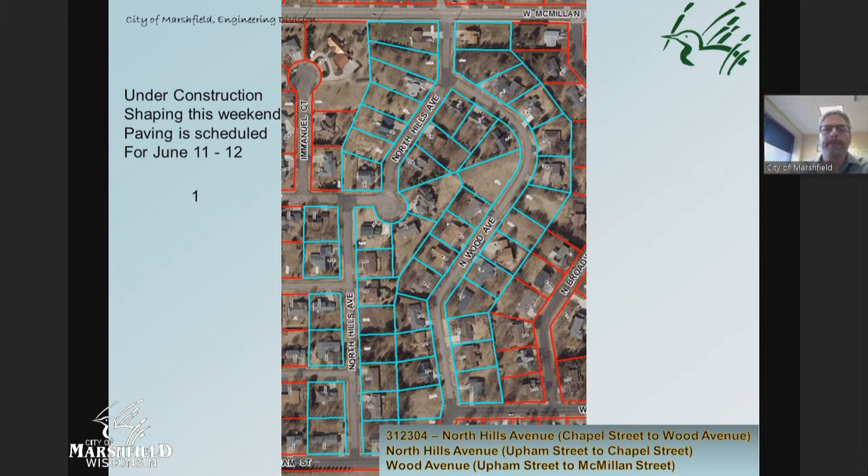With that being done, they're planning to move their crews to Fairview Street and start on Wednesday, June 10th. This is from Schmidt Avenue to the west.

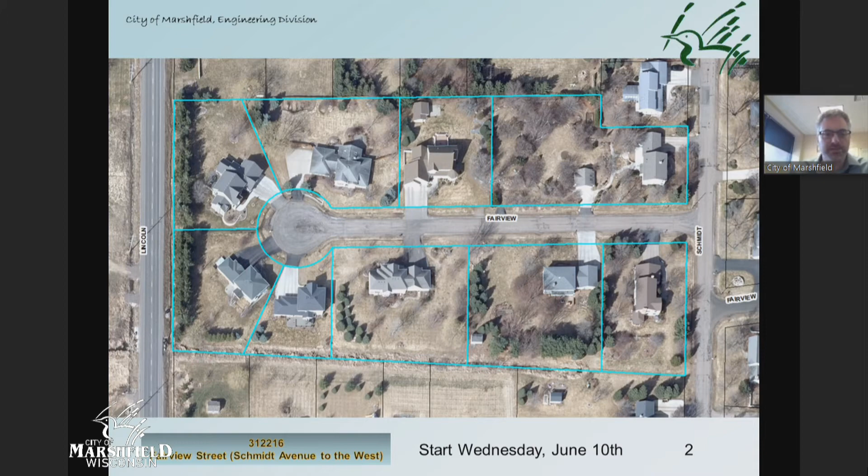Following that project, they will move to 4th Street, Larch to Mulberry Avenue, and then Mulberry Avenue, 4th to the Cul-De-Sac to the north.

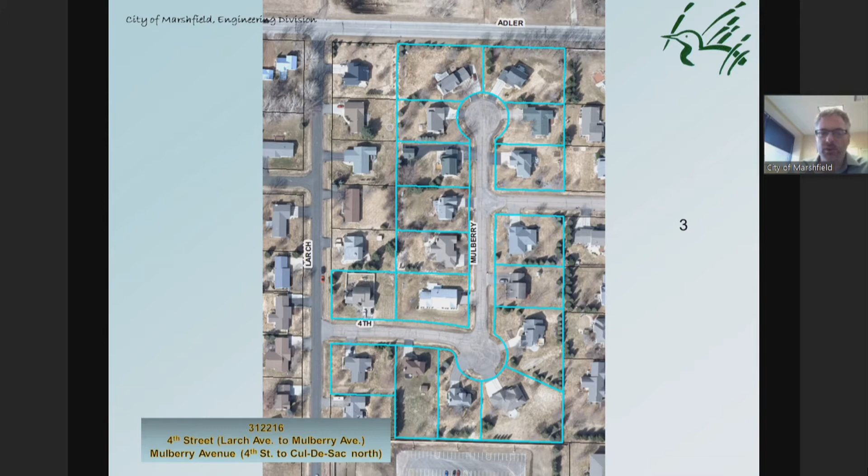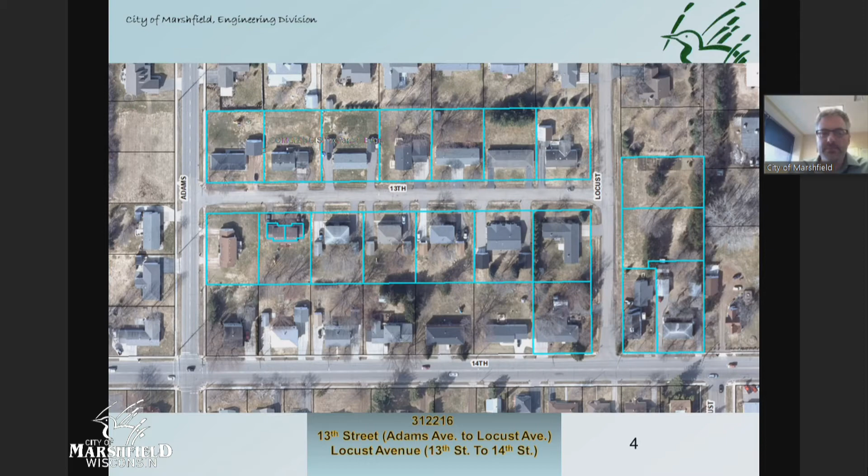And then they will move to 13th Street, Adams to Locust, and Locust Avenue from 13th Street to 14th Street. Then they will work their way down to Schmidt Avenue from 14th Street to 17th Street.

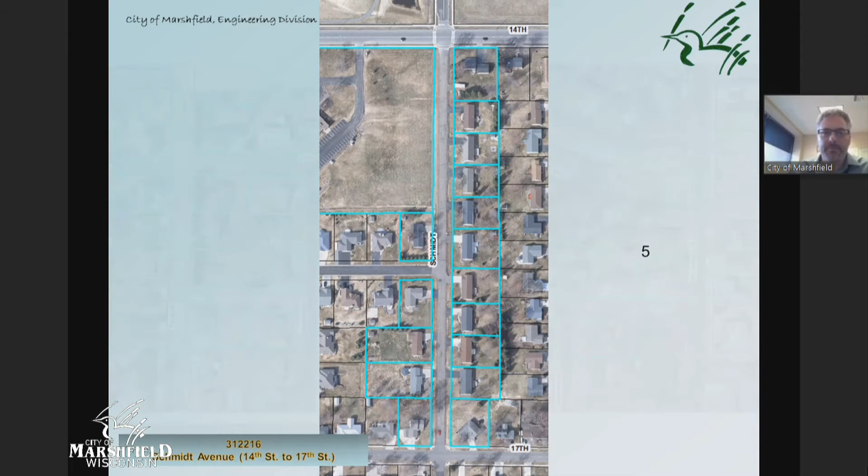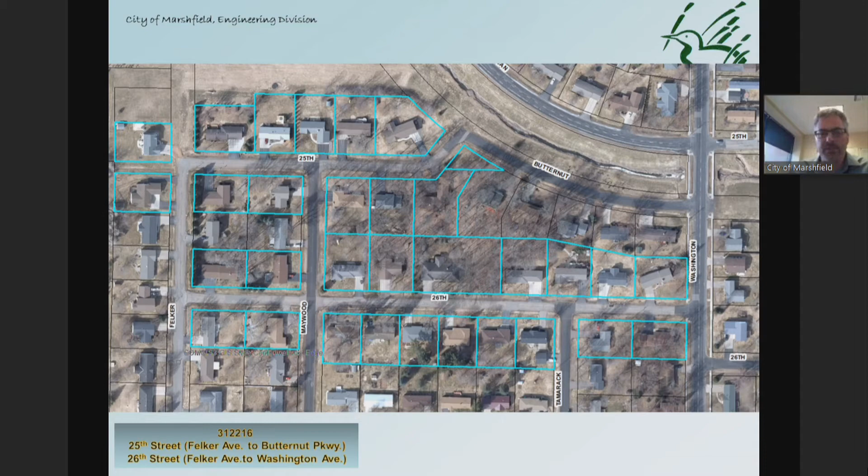Then we have a couple alley projects. The first one being Central Avenue to Maple Avenue, Blodgett Street to Cleveland Street. In these projects, we will actually mill 2 inches of the existing asphalt on the alleys off and then replace the asphalt.

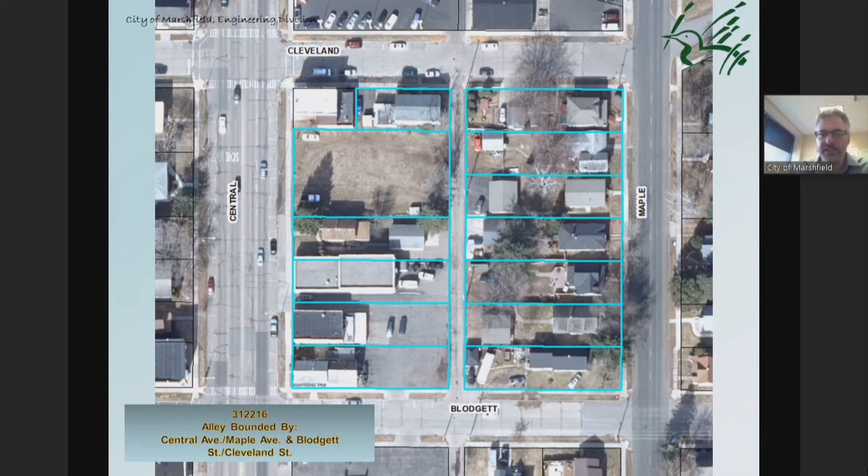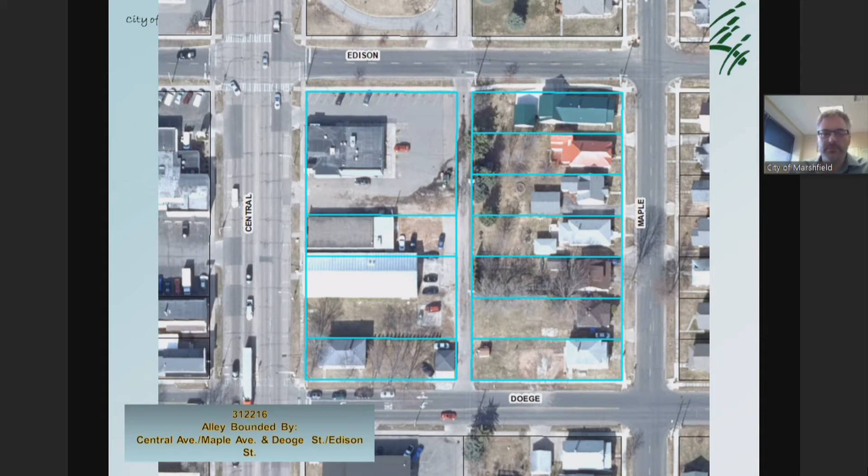The second alley project is bounded by Central Avenue and Maple Avenue, Doege Street to Edison Street. Then we have Cleveland, Apple Avenue to Palmetto Avenue, and Apple Avenue from Doege Street to Cleveland Street.

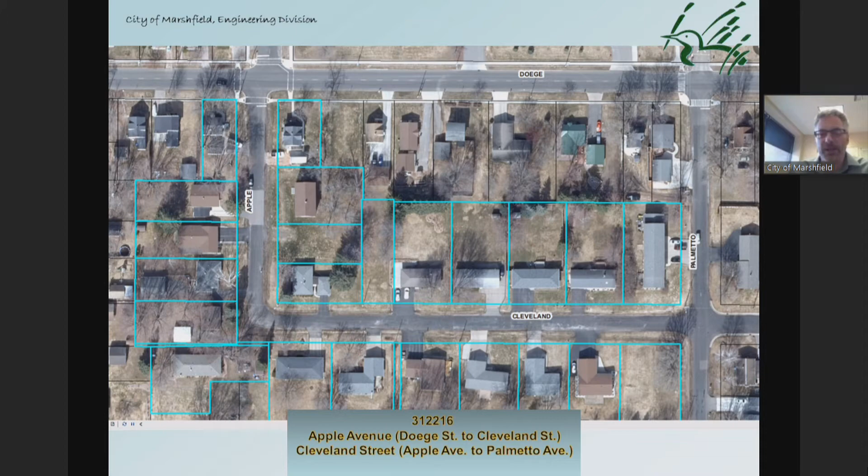This project will be taking place later this summer, but we have just been notified by We Energies that they want to get in before we start any of our work and replace the gas mains on this project. From there, they're going to go to Hume Avenue, Blodgett Street to Fillmore Street.

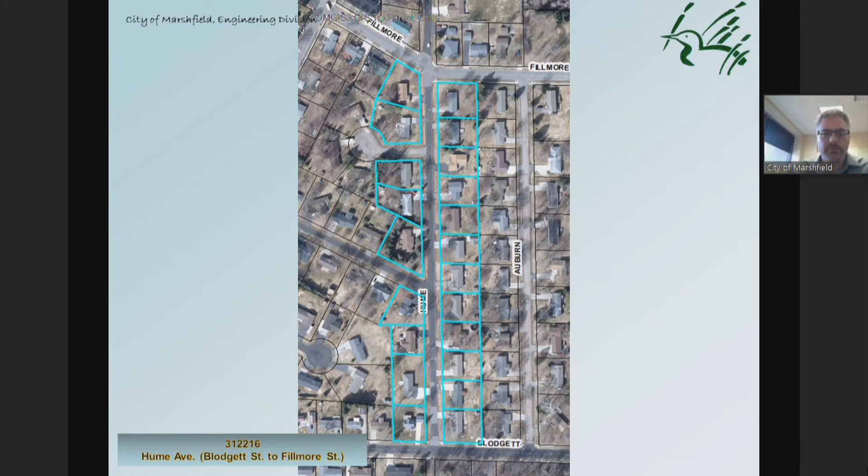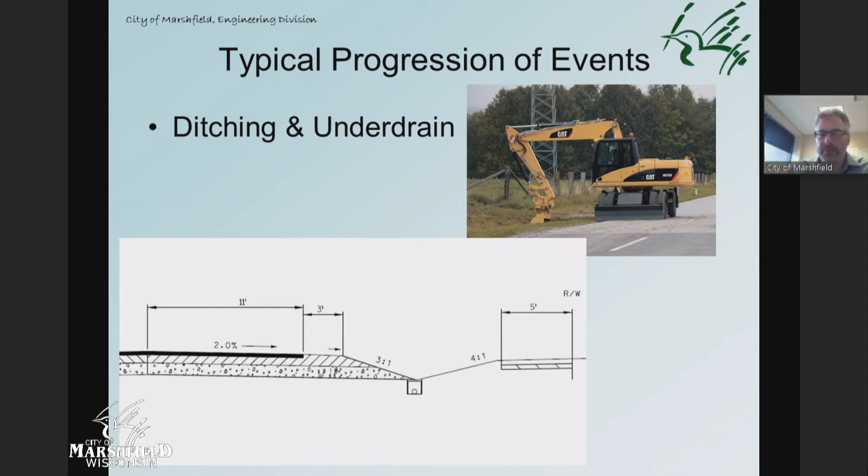The typical progression of events for these mill and place projects is to start the ditching and under drain installation. What we do is put under drain typically about 1 foot below the bottom of the ditch bottom. With that under drain, we can connect sump pumps to it, which will help keep the ditches drier.

Curb stops: Marshfield Utilities service rules state that the curb box belongs to the property owner. If the curb stop is higher than the ditch, it's up to the homeowner to make adjustments to the height if they so choose. If the street division does damage any curb boxes while doing our work, we will repair it.

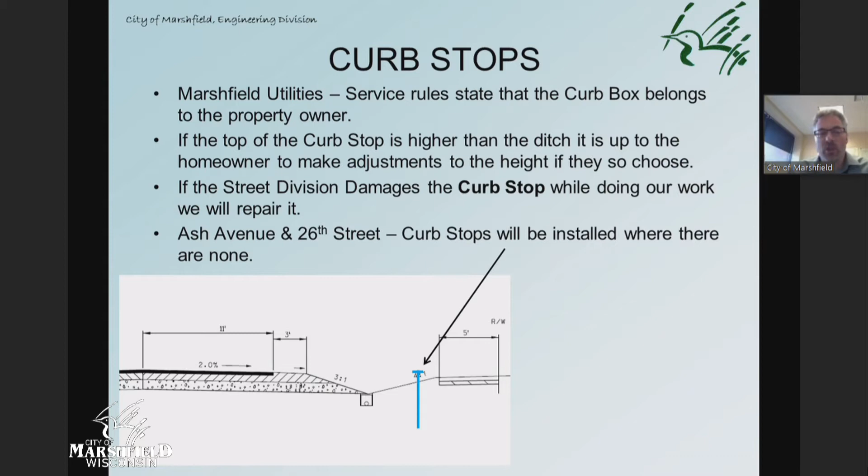On 26th Street, curb stops will be installed where there are none. When under drain is finished, we do allow sump pump drains to be connected to our under drain system, but we can't allow downspouts or yard drains to be connected because these carry debris and other materials, which will plug up the under drain system and cause it to fail prematurely.

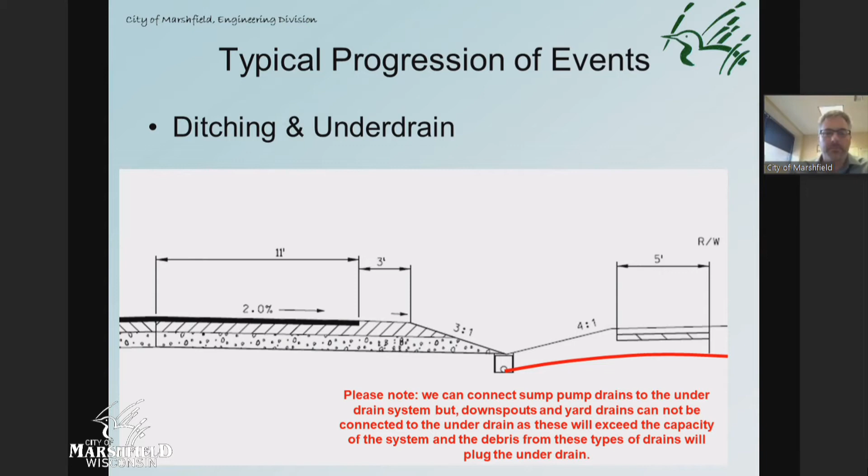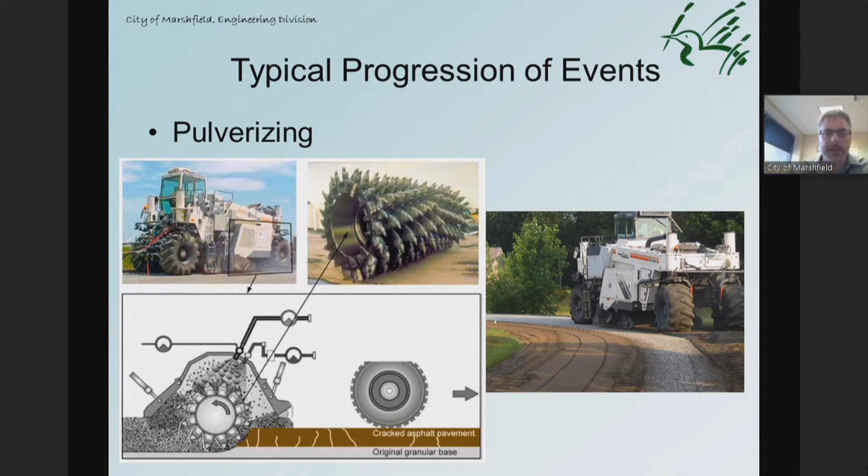They'll roll it probably right afterwards and do a little bit of blading, and then it'll be drivable immediately after pulverizing. Again, they start grading and compacting afterwards.

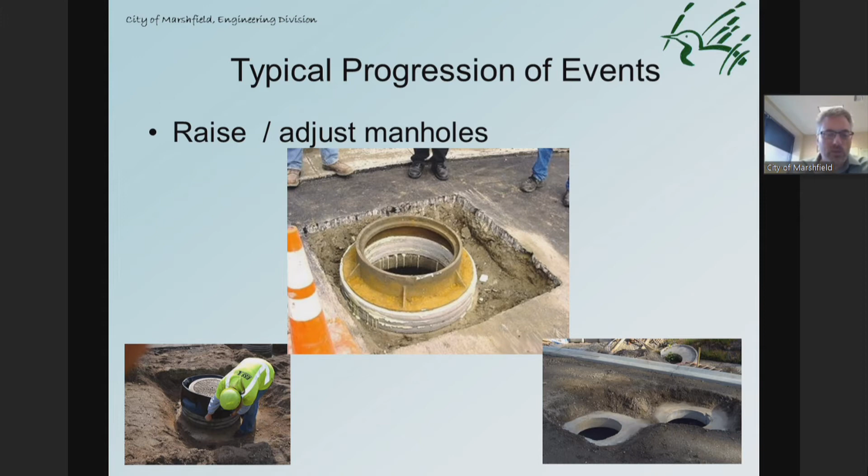After they've done the fine grading for these projects, they'll adjust and raise the manholes to the new elevation of the forthcoming street, and put any adjusting rings or protections for the sanitary sewer manholes for water infiltration and such on those.

Then it's waiting for the asphalt paving crew to come and put down the asphalt pavement. Generally, when this is done, we like to have vehicles stay off of it for at least 24 hours so that it has a chance to cool down, and we really reduce the amount of marring that takes place by waiting that 24 hours.

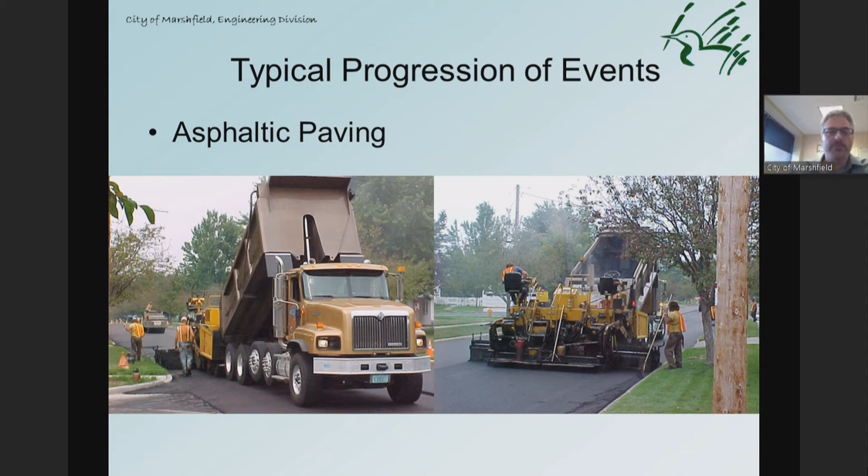And then after everything is said and done, there's a shouldering process. With the shouldering machine, we use recycled asphalt from other projects we've had, and we find that this works better than just throwing down gravel. It kind of holds in place much better.

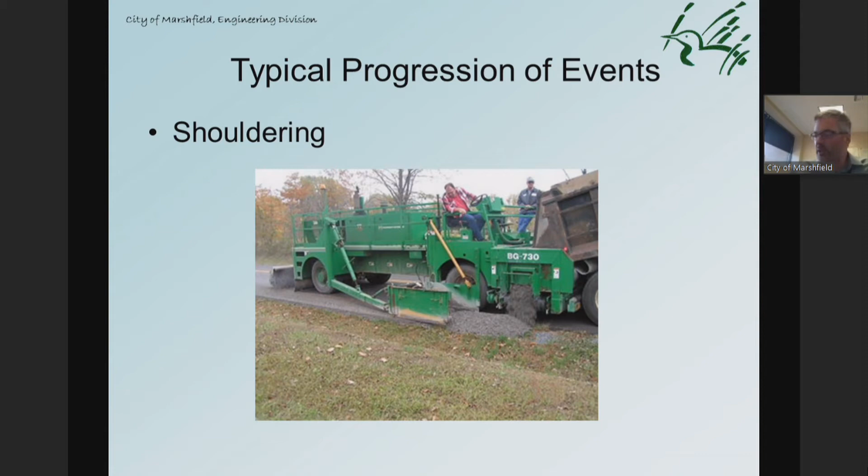The construction schedule for most of these projects is very fluid. Kurt Bornbach, the assistant street superintendent, is the person that has all the answers for the structure of the schedule for all these mill-in-place projects, as he's the one that does all the coordination for it.

First, you'll see the ditching and under drain, pulverizing, adjustment of manholes, and then preparation for paving and shouldering. Both the paving and pulverizing are based upon the availability of equipment from the asphalt paving contractor. We typically only know about 1 to 2 weeks ahead of time for their schedule, and even their schedule can be disrupted very easily if it rains.

The street division does like to put out door hangers to notify residents of forthcoming work, such as the milling and the paving operations.

So the sequence of events: the adoption of the budget was done in November. We began survey in August and September. We had our initial PIM in February. Preliminary resolutions were completed in January.

We mailed the special assessments this last month, which include the notice of public hearing, installment assessment notice, report of the city engineer, and the Schedule D, including the estimated special assessments.

Now we're having our second PIM for these, and we'll have final plan review. Since we're not having a public meeting, I will put the plans online. And if you have questions on specific projects or specific to your property, we invite you to give us a call, and I will put you in contact with the designer for that project.

So what happens after we're completed with the project: we create the final assessments sometime around next January and mail final assessments in 2021.

Some of the things we like to know is whether or not you or a neighbor have access considerations we need to be aware of. We like to be as accommodating as possible with these projects.

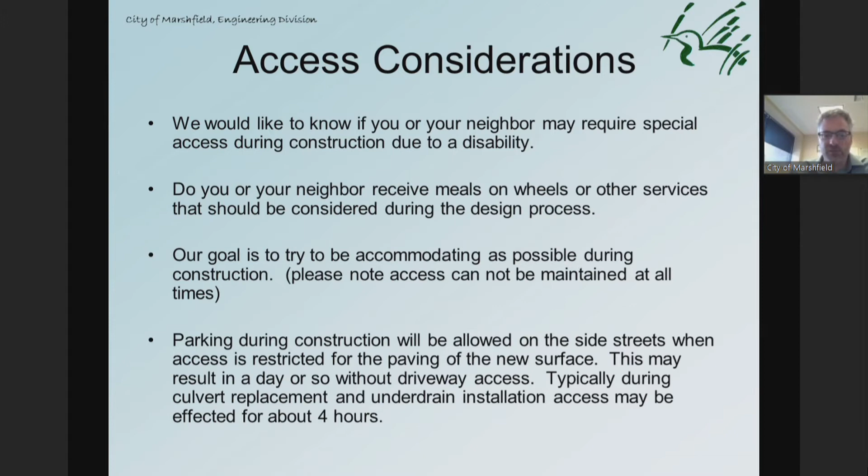So when they're doing the ditching and they pull out the culvert and put the under drain in a typical driveway, you're typically out of access for about 4 hours for your driveway. And then when the paving takes place, access is disrupted for approximately 24 hours.

How services are affected during construction: the post office will continue providing mail service as normal. Trash and recyclable garbage service will be provided as normal. If there is a disruption, please contact our street division, and they'll work with Advanced Disposal to address any disruptions.

Water service will not be affected during construction, but on 26th Street, short service disruptions can be expected for curb stop installations as necessary, as well as putting the temporary water system in as they replace the water main on that street. Sanitary sewer service will not be affected during construction.

If you have had issues with your sanitary sewer lateral, this would be an appropriate time to make repairs necessary prior to final paving. And I will go through some of the sanitary sewer service lateral replacement program that the city has.

Parking: access to your driveway for the mill-in-place project is only disrupted when resetting and replacing the driveway culvert, and during the placement of asphalt pavement, allowing the asphalt pavement to cool properly helps prevent marring and ruts.

And emergency services are made aware of our projects continually, and they know of the road closures and construction sites where they may have limited or reduced access.

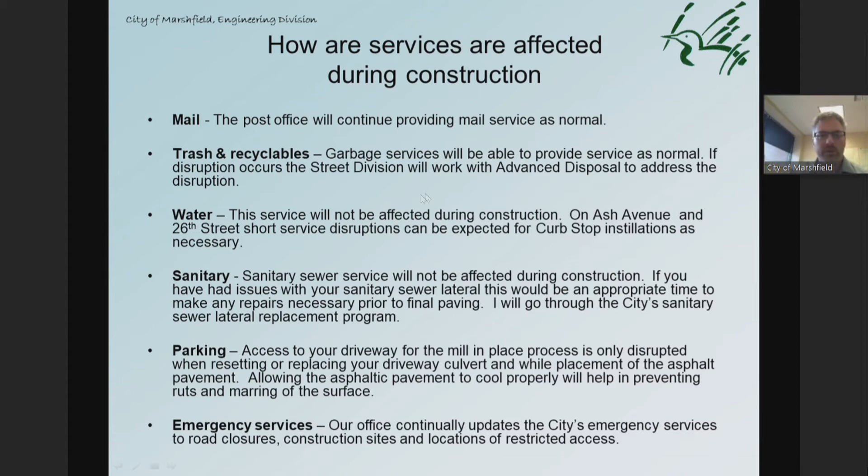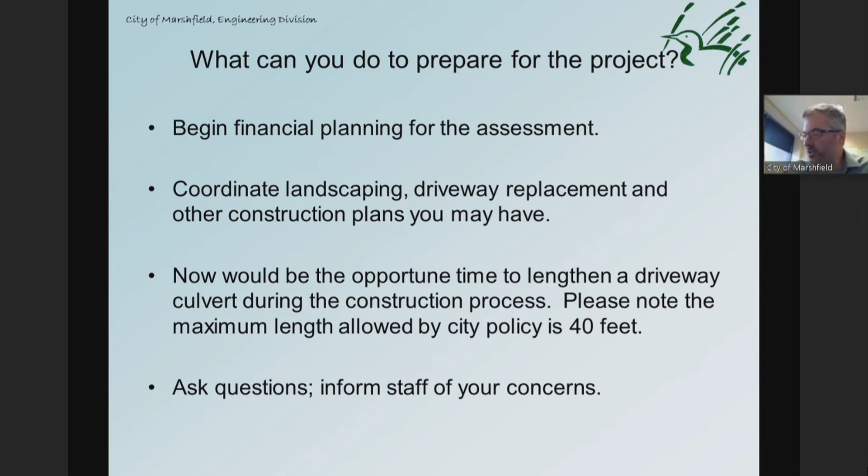So how do you prepare for our projects? You can begin financial planning for the special assessment, coordinate landscaping or driveway replacement and other construction plans you may have. Now would be an opportune time to lengthen a driveway culvert for the construction process. Please note the maximum length allowed by city policy is 40 feet. And then ask us any questions or concerns that you may have.

Funding. Pulverizing and paving are assessable items on these Mill in Place programs. Assessments are based upon the ordinance of the 1/3, 1/3, 1/3 share, where the cost of pulverizing and asphalt paving is assessed to the homeowners on one side for a third of the value, assessed to the other side for a third of the value, and the other third is covered by general tax dollars.

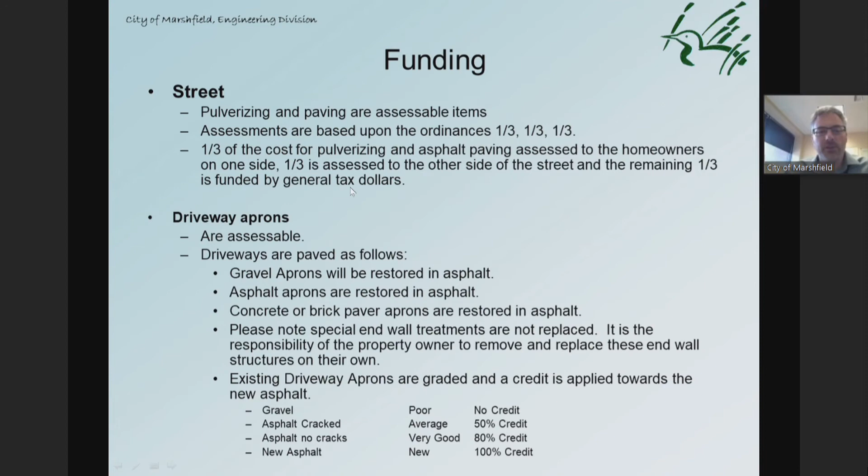Driveway aprons are assessable, and they are paved as follows. Gravel aprons will be restored in asphalt. Asphalt aprons get restored in asphalt. Concrete or brick paver aprons are also restored in asphalt, unless a homeowner decides they want to do that outside of the project.

Please note that special end wall treatments are not replaced. It is the responsibility of the property owner to remove and replace these end wall structures on their own. Existing driveway aprons are graded, and a credit is applied towards new asphalt.

Gravel driveways are considered poor and no credit is given. Asphalt that is cracked is considered average, at a 50% credit. Asphalt with no cracks, or in very good condition, gets an 80% credit. And new asphalt, if you have a receipt showing your driveway was done within the last year or so, will get 100% credit.

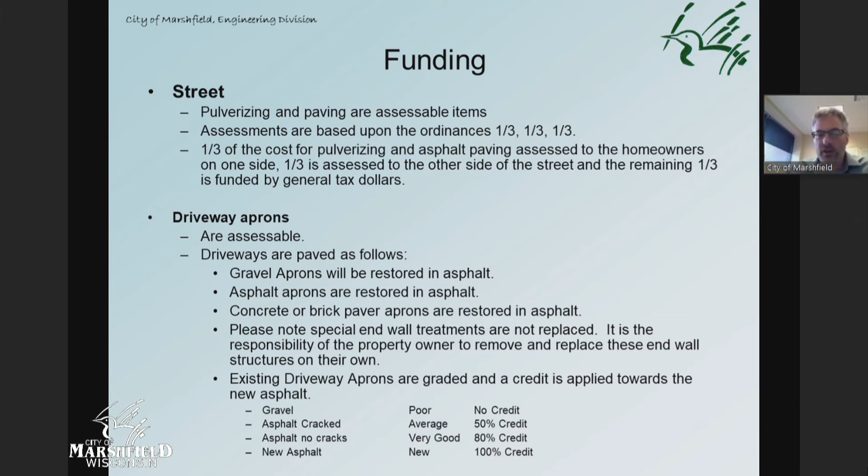Ditching is not assessable, and this includes the installation of the underdrain system.

Culverts are the responsibility of the property owner, and the cost associated with lengthening or replacing the specific culvert type is assessable. In some instances, if the culvert has no rust holes or is fairly new, replacement may not be necessary. The city will be supplying the replacement culverts for these Mill and Place projects. The cost for the culverts has been added to the estimated special assessments, and if the culvert does not require replacement, that cost will be removed from the final assessment.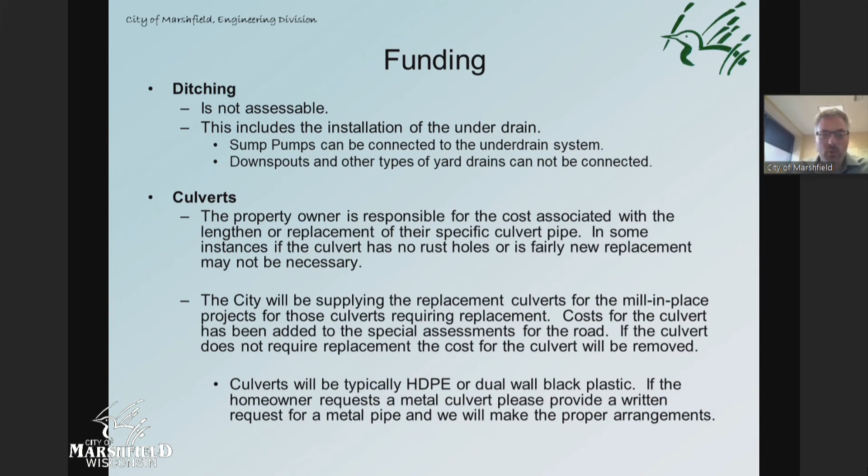Culverts will typically be HDPE or dual wall black plastic. If the homeowner requests a metal culvert pipe, just please give us a call or a written request and we'll make the proper arrangements. This is what a dual wall HDPE pipe looks like.

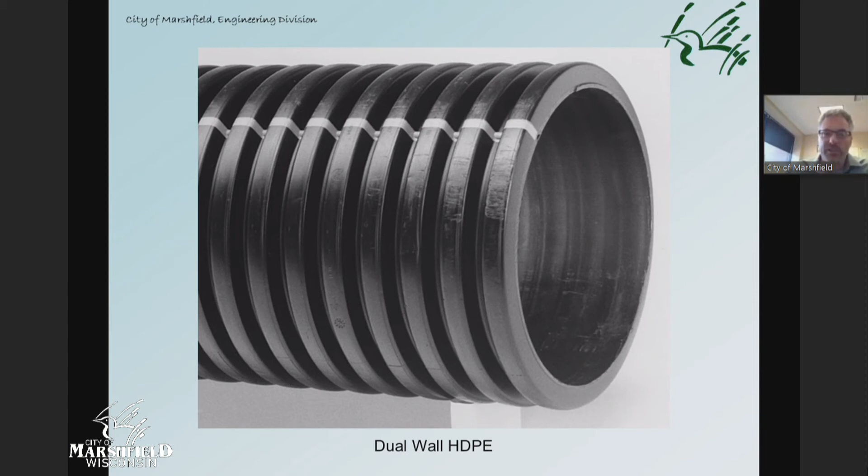Even when you put these in, because we are only putting about 4 to 6 inches of cover over the top of these pipes, you will typically get a reflective crack that shows up over the top of these plastic culverts. We've been able to reduce some of that with the use of underdrain, because we've reduced the amount of frost heave that takes place, but these pipes do still flex a little bit.

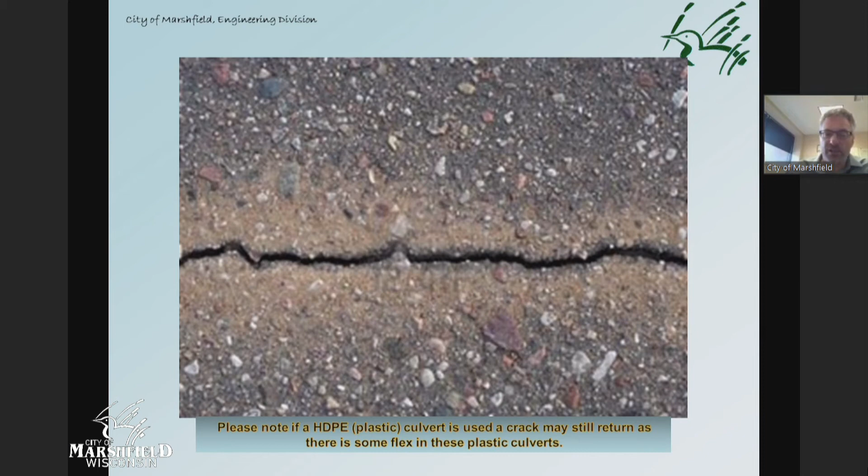Sanitary sewer lateral replacement policy. Now would be a good time to review the condition of your sanitary sewer lateral. The City of Marshfield Wastewater Treatment Plant will take and televise your lateral at no cost to you, so you can see what the current condition of your lateral is.

If you've ever had root problems in the past, they will need to have these removed before televising can be effective. Addressing your sanitary sewer lateral now can save a road cut in the future, which in turn helps with the longevity of the new roadway.

The city has implemented an incentive for sanitary sewer lateral replacements, and I'll go through this in more detail further on in my PowerPoint presentation. To schedule a televising, please contact the Marshfield Wastewater Treatment Plant at 715-486-2007.

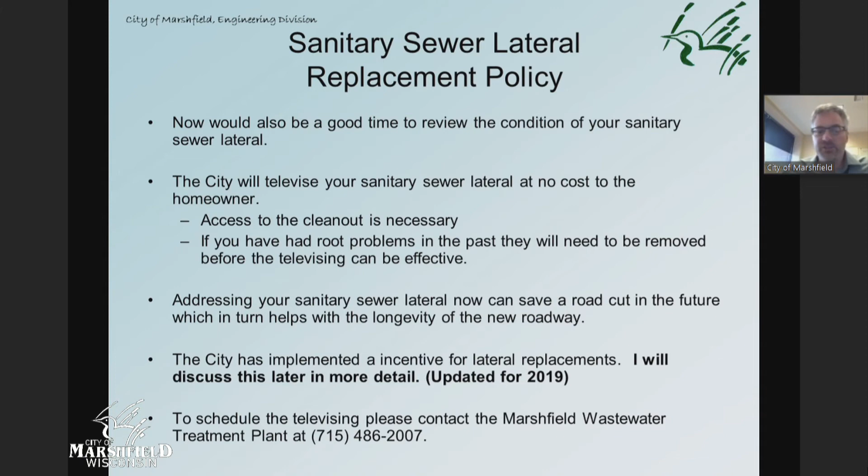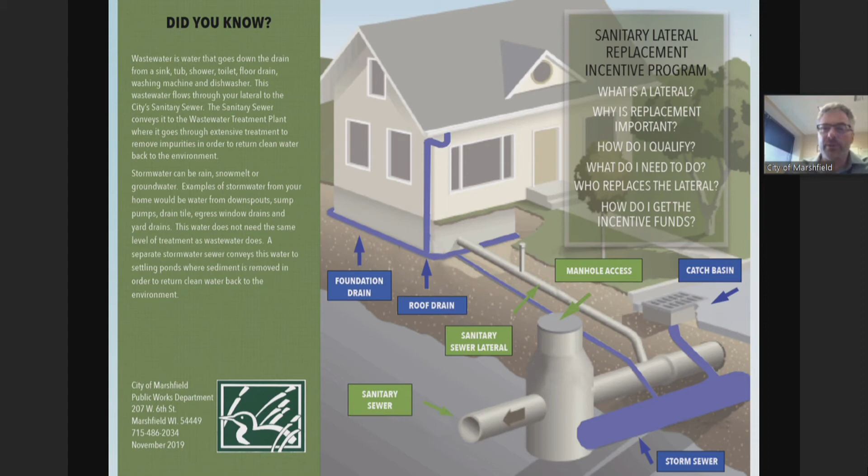With the letters and information you received, you should have also received a copy of our sanitary sewer lateral replacement incentive program. I won't go through these in detail, but basically they come in and can televise from inside the house and give you a condition report.

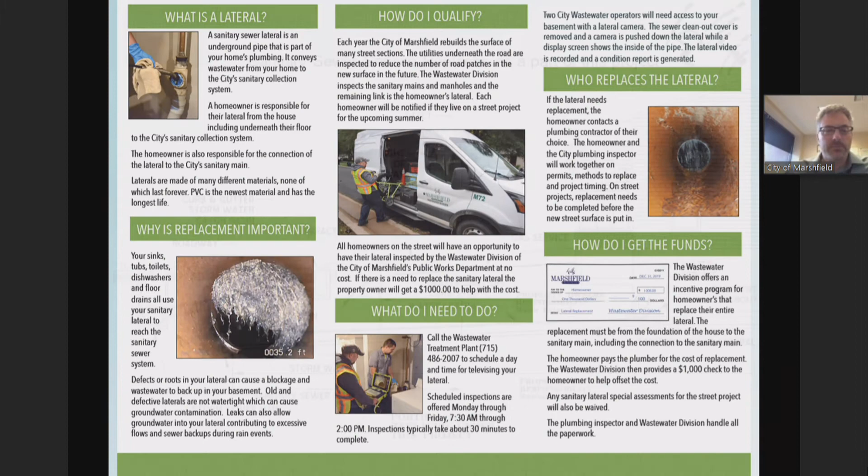We are not planning to replace any sanitary sewer laterals on this project or any of these projects, but if a homeowner does decide to replace their sanitary sewer lateral from their basement to the main, the city will issue a check as part of our incentive, prior to paving, of $1,000.

In some instances, if your home has a lead water service, you can also work with the Marshfield Water Utility to have them replace your lead water service.

With special assessments, there are several payment options. The estimated special assessments have been calculated and mailed. Final assessments do not get calculated until 2021 and are mailed out in March of 2021, based upon what we actually use out in the field. In most instances, the estimates are based on a worst case scenario, so we are giving a little bit inflated value with those estimated special assessments.

So the payment options, when you do receive the final payment, is you can pay the entire amount in 60 days from the date delivered. And again, this does not occur until 2021.

For those at $500 or less, the option you have is 1 year to pay it with your taxes. If it's $501 to $5,000, 10 years, and $5,001 and greater is 20 years. Assessments can be placed on the tax roll at the time frame noted above. Interest will be charged per the Common Council, typically 1.5% over the interest rate for that year's borrowing, which this year has been set at 4.6% for 2020 projects. The installment assessment notice that you received will have the specific information about that interest rate.

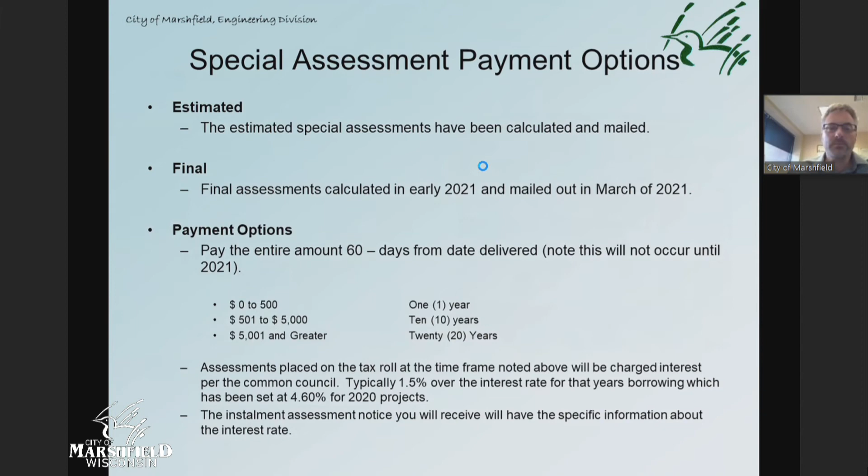So how do we calculate special assessments? Well, the frontage is an actual measurement of the front of the parcel. Sideage on a corner parcel lot is prorated at 50% of the front foot rate for residential properties and 75% of the front foot rate for all other uses. The culvert is the actual cost of culvert used, and that'll be assessed to property owners.

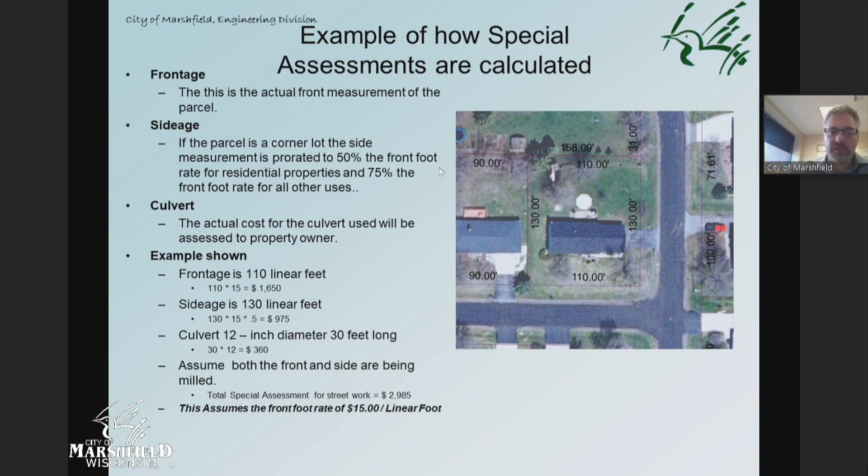In this example, we have a property on a corner lot, and if we assume that both the front and side are being paved adjacent to it, we have a frontage of 110 feet, and if we assume $15 per linear foot, that's $1,650 for the frontage. The sideage on this parcel is 130 linear feet, and if we assume $15 per linear foot times the 50% rate, that's $975. And a 12-inch culvert, being 30 feet long, estimated at about $12 a linear foot, is about $360. So in this instance, the estimated total special assessment for this street work would total about $2,985, assuming a $15 per linear foot assessment rate.

Now, on cul-de-sacs, assessments are calculated differently than regular streets. Per the City of Marshfield Municipal Code 13-96, cul-de-sacs are typically based upon an equivalent frontage and sideage, calculated as follows. In this example, a typical lot from a neighborhood is selected. So lot 16 has a width of 106 feet and a depth of 170 feet, which equals 18,020 square feet.

When we try to calculate lots that are in a cul-de-sac, like lot 14, it's actually 25,706 square feet. If we divide that by the 170 feet of depth, it equals 151.22 for the equivalent frontage, versus what the measured frontage actually is, 51.83. In lot 15, we have 14,900 square feet, and you divide that by the 170 feet of depth, you get an equivalent frontage of 87.64 feet, where their current frontage measures to be 114.65. So it's basically relating the assessment due to the size of the lot to make it comparable for all properties involved.

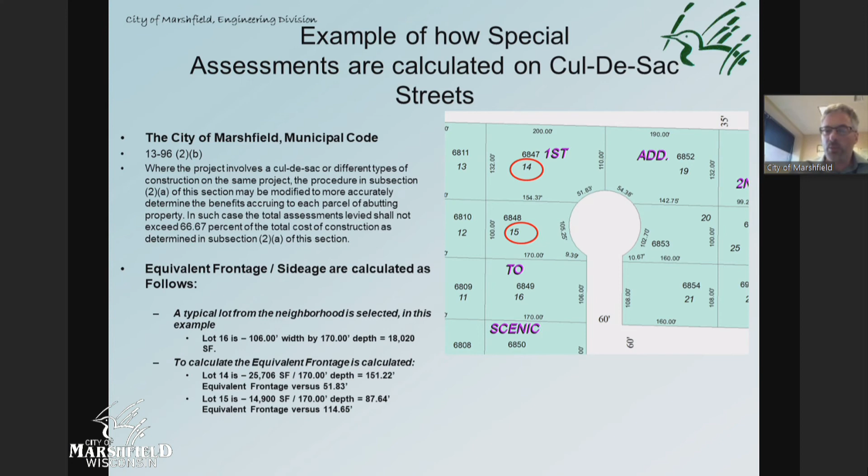Driveways are assessed as follows. Let's say in this example we have an existing driveway that's 25 square yards in average condition. So 25 square yards at $30 per square yard is $750. We apply an average credit of 0.5, so $375 for the assessment on this apron. We'll assume that in this instance the homeowner wanted to widen it another 5 square yards. That new 5 square yards is then assessed at the full rate, which in this instance is an extra $150. So the $375 plus $150 equals $525 for the final apron cost, assuming an asphalt rate of $30 per square yard.

Taking the entire project cost from the previous page, the final assessment for this parcel would be a frontage of $1,650, with sideage at $975, a culvert at $360, and an apron at $525, for a total special assessment of $3,510.

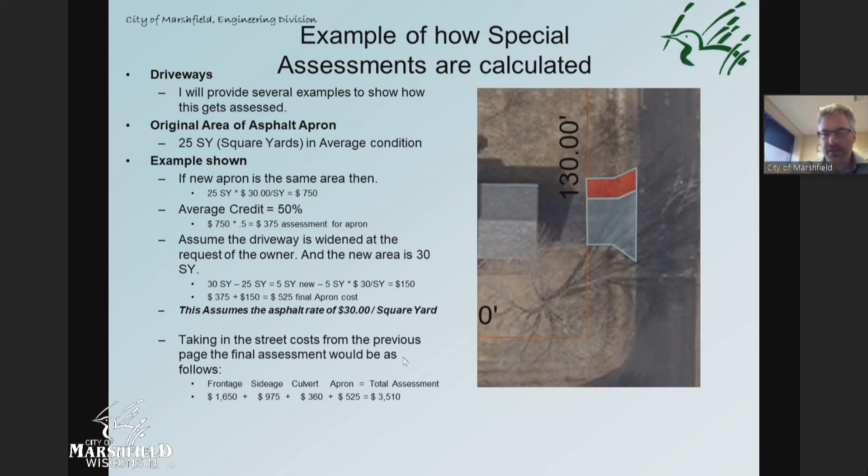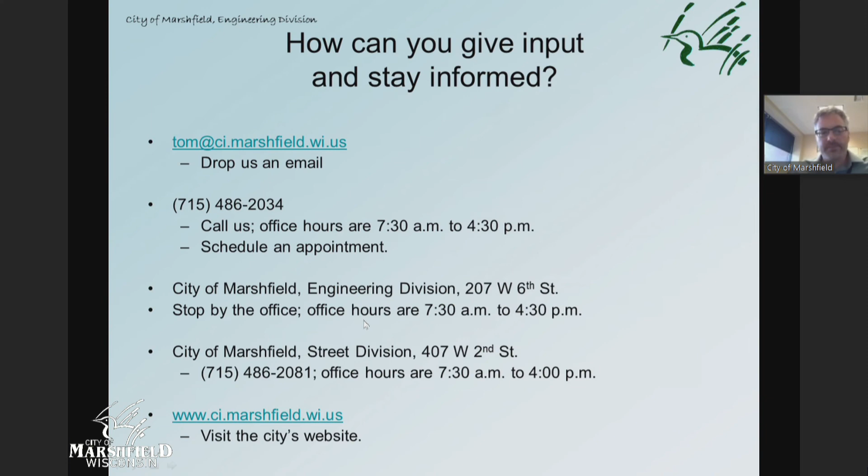So how can you give input and stay informed? First, you can drop me an email at tom@ci.marshfield.wi.us. You can give us a call in our office from 7:30 a.m. to 4:30 p.m. at 715-486-2034. You can stop by the engineering division at 207 West 6th Street or the street division at 407 West 2nd Street. Or you can visit our website at ci.marshfield.wi.us.

As plans are completed, we will be placing them on our website for public viewing. This PowerPoint will also be placed on the engineering division webpage for your convenience, along with access to the recorded meeting.